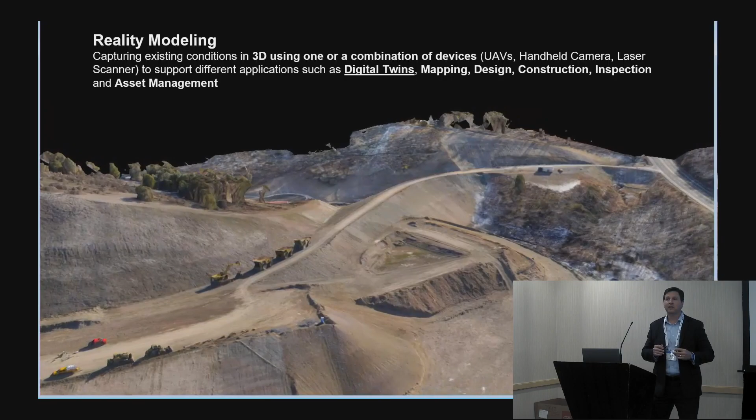Here's just a video overlap where a drone was used to capture this area of interest. Because you have it tied to survey control, you're able to develop some survey deliverables out of there. So you can create some DSMs, you could create some DTMs. You have LiDAR, you have photogrammetry.

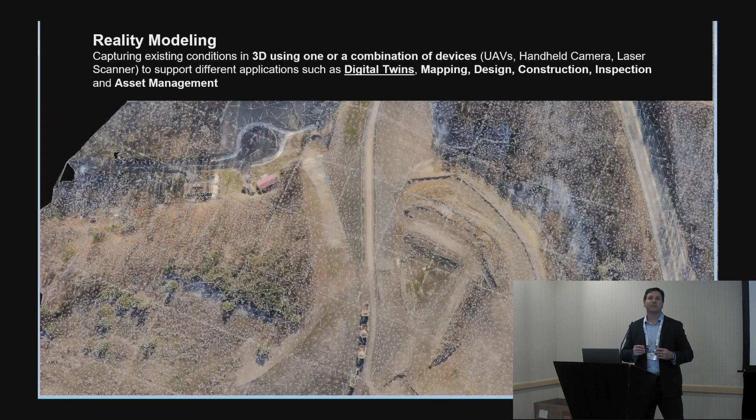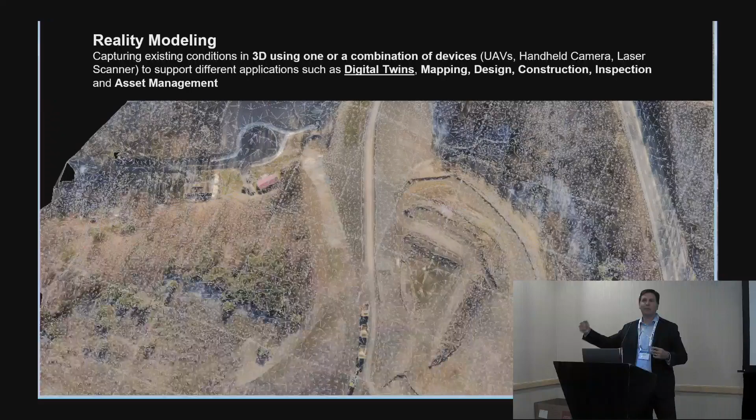But it's a good application because the quality of the data from drones and photogrammetry can get down to 1 to 2 centimeters horizontal and then 3 centimeters vertical, which is phenomenal when you look at it compared to taking millions of points.

And that's like you're going out there and capturing it with a GPS unit as well. Here's another concept explaining it again, using all of the different sensors and then putting all of this together to...

Capture this asset. In this case, on the right, we have this bridge pier, and that bridge pier was turned into a digital twin. So now we have a physical replica, or a digital replica, of that object.

And before we get into the San Clemente project, this is another one that's pretty cool.

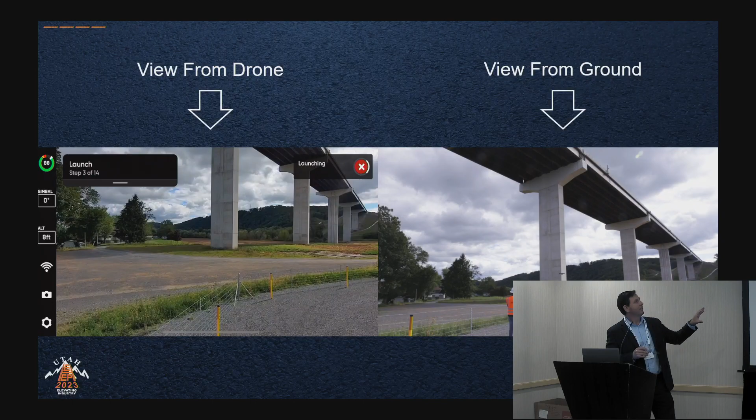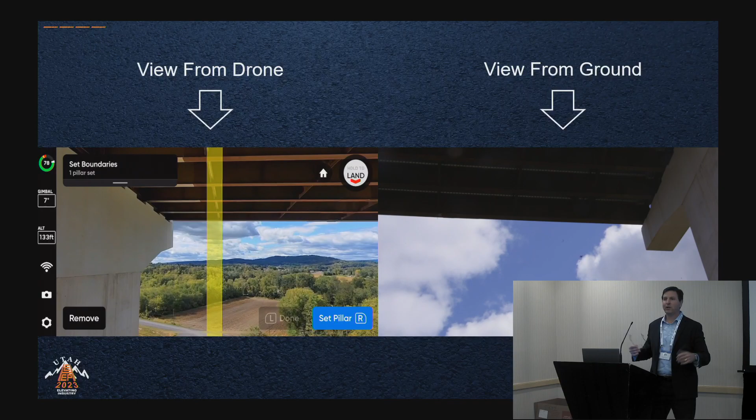The way we do that is we might fly a drone, and the left side is going to be what the drone sees, and the right side is what the view is from the ground as the pilot or operator. So the pilot comes out there and says, okay, what am I trying to capture? Here's my ground, here's my top, here's my bounds. And it's going to do two things: fly around there and model that, and using artificial intelligence, put that in memory. Then it's going to ask, how tight do you want your inspection? So you specify it, and it produces that.

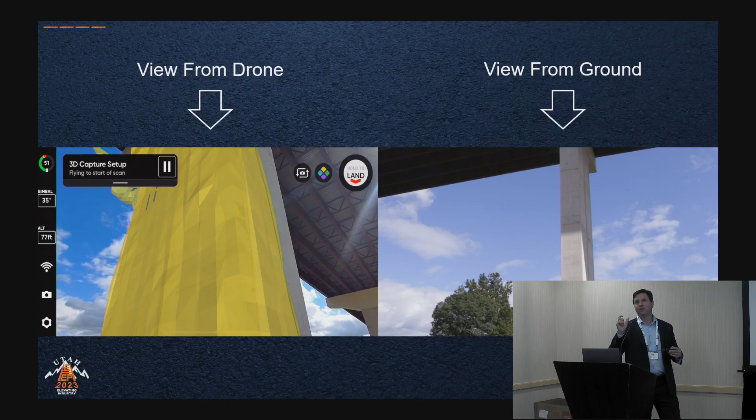So with that information, you could come back and reconstitute that in various products like Pix4D or Bentley Context Capture to produce a digital twin. I always thought it's good to see how the system works in the background, and that's kind of the view of it.

On the digital twin front, here's the project in San Clemente, a digital replica of the built and natural world, basically a digital mirror of the physical asset, and it can be connected to sensors for real-time data input. In this case, we're looking at about 700 feet of an area in San Clemente, California.

This area was positioned to stabilize a landslide that was happening. In this particular case, the landslide was impacting homes, and you have red tag and yellow tag designations. Red tag means there's some issues with the home, you're not coming back into it. Yellow tag means there's caution here, it's habitable.

So by using data like this, we're going to see how that information can be used to impact the community and other benefits as well.

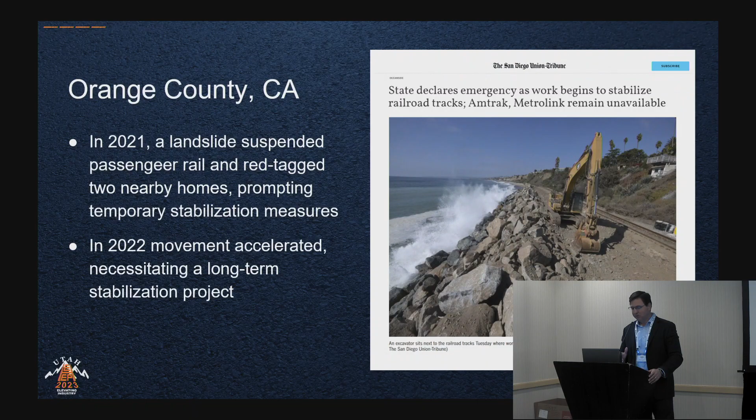So the case study we're going to look at is Orange County, California. In 2021, a landslide suspended passenger rail and red tagged and yellow tagged nearby homes, prompting temporary stabilization measures. In 2022, movement accelerated, necessitating a long-term stabilization project.

So our role in producing this digital twin and sensors was we did a drone flight. We set out survey control points, so that way we have the digital twin on top. We have the sensors that went into the ground, and we'll look at where the positions of those were shortly. We have a good relationship with various vendors.

Phoenix is one of them, who's in the room too. And then we have Wingtra, they're based out of Switzerland. So we try to use the best of breed drone for the project. We have relationships with 10 plus vendors, and depending on the project, we bring the best suite of tools for it.

So in this case, we used a Wingtra fixed wing vertical takeoff and landing drone, which was able to capture the area of interest to get the survey quality we were looking for on the ground. We used Bentley Context Capture software to combine the imagery with existing survey control to develop interactive 3D models for the project site. And then for sensor integration, we had two IoT-enabled inclinometers that transmit data to the Bentley SenseMetrics platform.

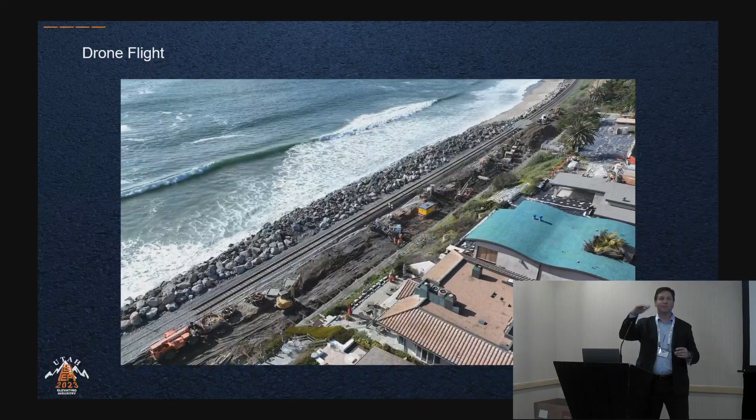Another coolness factor, this is what it looks like when we talk about vertical takeoff and landing. That's the drone. It takes off vertically, which means we don't need a lot of footprint on the ground, and it'll turn into an aircraft. It'll fly the area, and then whenever it's done, it'll capture the area of interest.

It has an onboard post-processing kinematic, so it's not real-time like an RTK. It uses a PPK, or post-process kinematics, survey data quality to produce it.

So if you look at our footprint, we had a congested area in a road, and there's some other fixed-wing drones that you take and land, and it has to belly land. Well, you need a huge runway, or a long linear swath, a corridor, and sometimes you don't have that. What I like about this platform is we used the same platform in the Grand Canyon. We had to launch from a 15 by 15 helipad. There's nowhere else to do it just because of the terrain. Being able to launch it there, do the work, come back and land is the right tool. So we felt like this was the right tool for the job in this case as well.

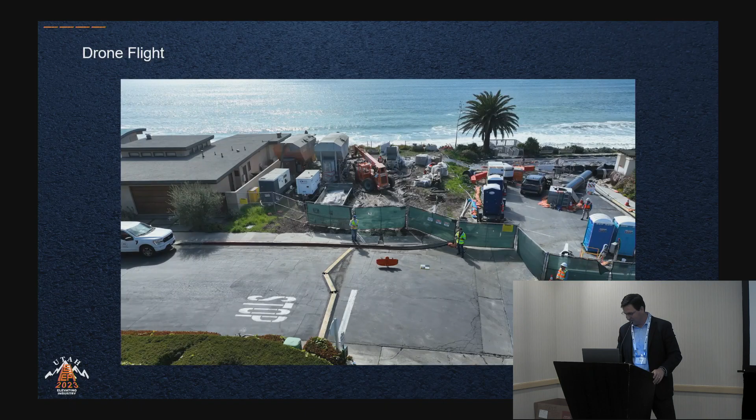This is a look of the digital twin. We're going to see a little video of that as well. But again, we have all of the data on it. Before we move forward, wanted to just highlight two areas here. We have...

positioned two inclinometers, one on top of the bank where the landslide's happening, and one on the bottom by the rail to see what was impacted. So when you're looking at the position, what are you trying to accomplish with it? What we wanted to see is, is it stabilized? Is it still moving on the land? And is it impacting the rail asset? So by having two of them working in concert, you're able to see those values and monitor those independently.

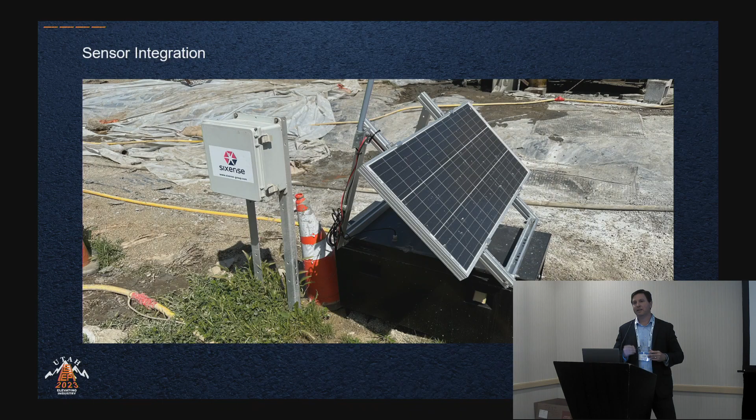This is the sensor integration here, looking at the application now. We have the digital twin on the top, kind of like a GIS system in a way where you could interact with it, highlight and click on these assets. If you clicked on the one on the top, which we did here, you can see each of the sensors have the reading that's happening as well. So I can see real-time data from my office - I'm based out of Lafayette, Louisiana, and this project's in California, but I can look at it and see what's happening now on the project site. It also has alerts set up that can automatically trigger based on what threshold you set - say if it moves beyond this, it's going to automatically send out an alert.

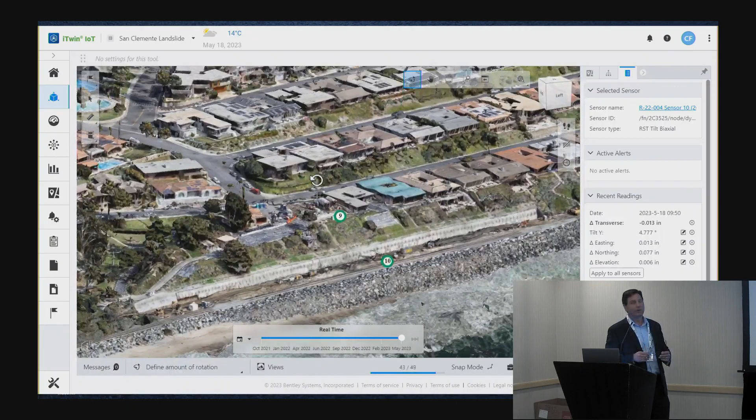And here's the digital twin concept now taken to fruition, where you could interact with it, turn it in 3D. It's geospatially where it's supposed to be.

Now I could click on this inclinometer on top and expand it. I think this one had 9 or 10 strands, and you can click and see the data in real time. Or I could click on any of the other ones, and it goes back to that graph. Coming back out, now I want to look at the one near the rail asset. You could click on that and get another set of data points specific to that asset or inclinometer.

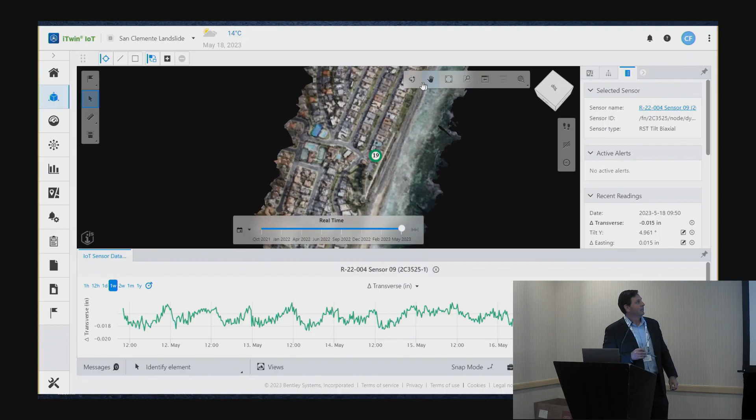And again, rotate it in 3D. You could overlay any property lines, any earthquake area—any specific layers you wanted to add additionally could be there.

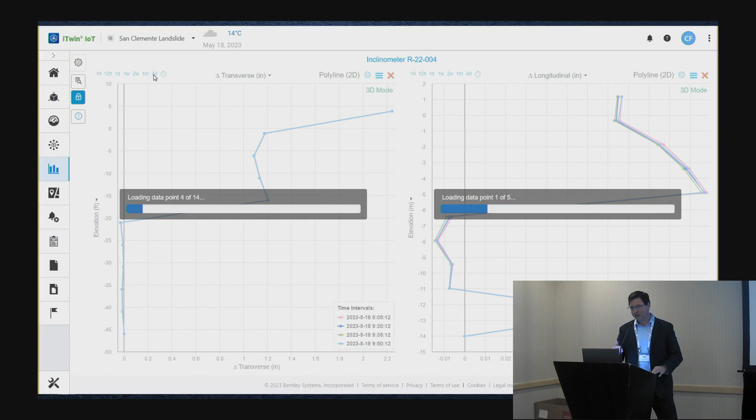What I like about this one is the chart view, because you can slice and dice. So we're looking at the same data we explained before, but as it loads up, I can say let's look at 1 hour, let's look at all time, and it'll slice and dice that in real time. Or I could come back and look at 2 weeks, 1 week, or show me the last day. Just by clicking through, you can pick what you're wanting to see specific to that asset.

Carlos, what was shown up in the other one with the digital twin—is that the maximum for that day, or is that what that's measuring, the maximum delta?

No, what it's measuring—this is kind of the same view here. Let me bring my mouse back. So this is October 2022, when it was set up and installed. And this is the line it shows right here. And then as we turn it on, as months went on, you can see it's moved less than a quarter of an inch. Then it moved 3/10 of an inch. Then it moved an inch. So every month that goes on, you can see the impact of the movement.

Sorry to interrupt, but do I understand you just had one sensor for that whole—did you say 700-yard section? No, we had 2 sensors—one in the rail and one on top of the bank where the movements were taking place.

Because I'm thinking of the UK, where they had a similar slip on the rail on the coast, and they had different bits of the slip with different mobility—could that not be the case here? It could, except this was a known historic landslide area, so they already had an understanding of where that anomaly was. But I think, to your point, further upstream there was another incident that's hard to predict without this type of data. So in this case only one sensor was needed for that particular project area, but for the whole length of the line, another tactic would need to be taken, because something could happen 2 miles, 5 miles up the rail as well.

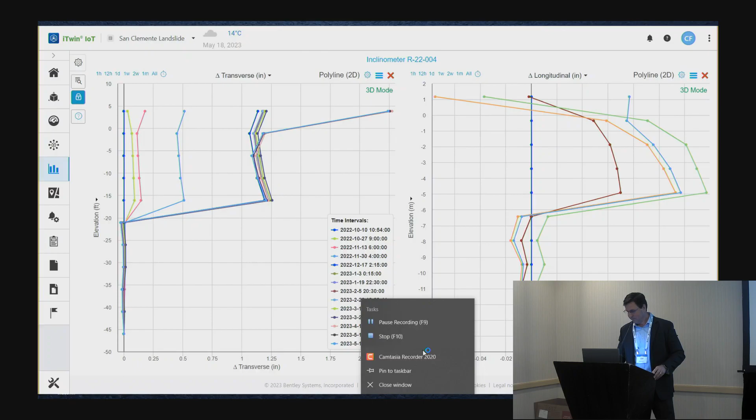So the PM, or the senior geoengineering geotechnical section lead, mentioned the inclinometers were a key decision-making tool. They informed the project team of movements along the landslide shear plane before they manifested at the ground surface. This early, real-time warning system mitigated risk to our client and the project team and enhanced site safety during construction. So that's what you want to hear—is it having an impact?

In this case, going back here to show one other aspect that happened—this was from a few months ago. You can see it's moved and stabilized around 1.2 inches, and then on this particular day it went from 1.2 inches to 2.2 inches, so it moved a whole inch. That triggered an alert we had set, and that triggered alarms. But whenever you look at the data, what happened?

At the earth movement, there was some bulldozer moving dirt, and it shifted where that strand was. The impact was just at the surface level, so very quickly you're able to look at it, find out what the issue was, where it's at, what surface level, and say it's not a concern - hey guys, don't go near the inclinometer. It could have been something where it happened at subsurface and this movement occurred, and then you take action as the owner.

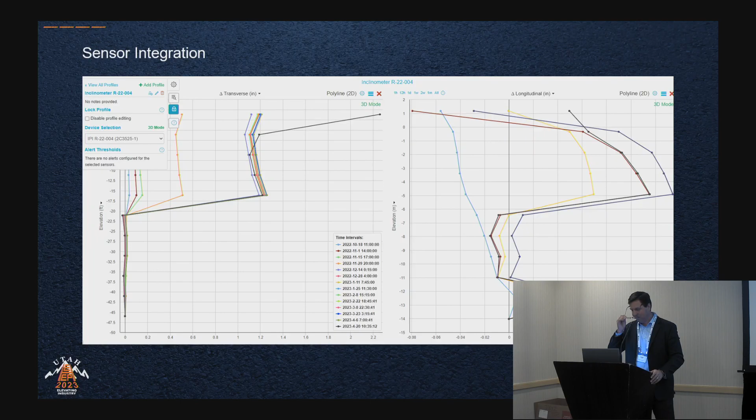So the big picture in asset management - we talked about digital twin, a little bit about artificial intelligence and ML. Today's topic won't be on it, but we use that in various inspections we perform. We do a lot of inspections where we use AI to detect cracks, and that's done physically. We also do that manually in parallel, just to review the results, but it's still done physically.

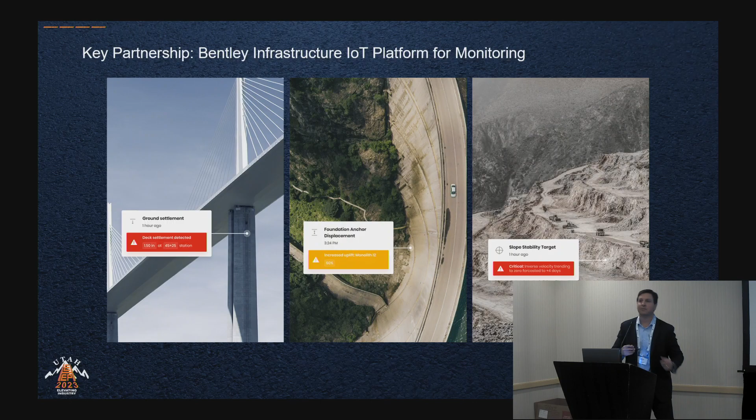So by combining all of those to the asset and using the fit for purpose approach, like we talked about on the drone side - when we did San Clemente, we used the fixed wing drone. Other projects for the bridge piers, we're using a smaller Skydio drone. When we do big projects like Bonneville Power, we use the Harris and the Riegl and the Phoenix system for those. So it's using the right tool for the job.

I think this is our last slide, so this is good on timing. What we're looking at for value add: sensor data was used to inform contractor activities in real time - pressure grouting drilling, that was the one where drilling operations moving some things set some alerts off. We found out it wasn't a big issue, but it made us pause and ask what's happening, which is great. Sensor data contributed to early resumption of passenger rail service 3 to 4 weeks ahead of schedule after 60% of the anchor installation, which mitigated cost of interim bus service and loss of rail revenue service.

Sensor data informed safety decisions for nearby residential development, and community benefits helped stabilize the residential area, and was used to take two yellow tag homes and make them habitable again. So what was interesting during the survey is someone asked a question - this is red tag, yellow tag, what does that mean?

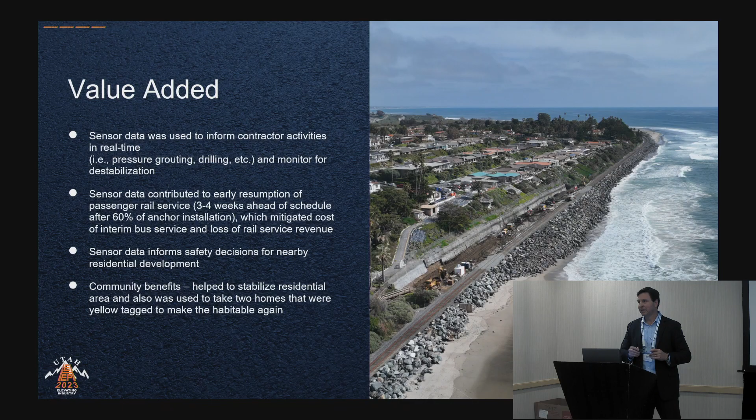These homes were impacted, so they had to move out. With the IoT system, they were able to deliver not only project benefits but also a community benefit, saying, hey, this yellow tag is stabilized, we're good, you can move back in. Whenever you can have a project that benefits both the community and the homes, that's a tremendous win we're proud to be part of. So with that, thank you, and if you have any questions.

Since you have an alert system and the railroad goes by, is the railroad also alerted if anything happens? They are, yes. Matter of fact, we don't want any ownership of it, so they have the alert. We monitor it ourselves too, so we can be apprised of it and help. But from a legal and risk standpoint, great question, we want the owner to have responsibility for it. We'll monitor it on their behalf, but at the end of the day, they own that and they get the alert. If we get it first, we're all getting it at the same time.

Was there a service level agreement for 99.99 uptime on this? Bentley has a service level agreement with that, correct. That's another thing, we don't want to develop this and manage it ourselves. They have firms that have this service level agreement, that's what they're in business to do. I know we have a solid IT department and stuff, but that's something we don't want to do, we put it on the vendors as well. So it's providing the suite of hardware, but also the suite of software that's best fit for us.

I've noticed you're monitoring situations that are catastrophic or potentially catastrophic. What about a common bridge, is there any use for it? I think so. With bridges, what I've heard is they've taken this inclinometer that's normally vertical and laid it horizontal. So on a bridge, kind of like where the carpet meets the baseboard, you lay it horizontal, and you can see where the displacement's happening, or track it over time. It's a tremendous tool because along that 50 foot span, it shows where along that length we're seeing angle displacements. So that, plus a whole host of other sensors, would have tremendous benefit for bridges, we believe.